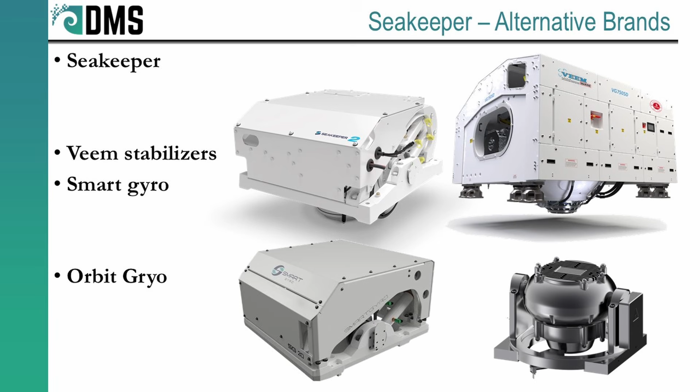I would be remiss if I did not mention that Seakeeper is not the only brand of gyro stabilizer on the market. They're just the brand that will most likely show up at the top of your internet searches. So I may use the term Seakeeper interchangeably with gyro stabilizer. This isn't an endorsement for one brand or another. I'm just here to talk about the technology of gyro stabilizers in general.

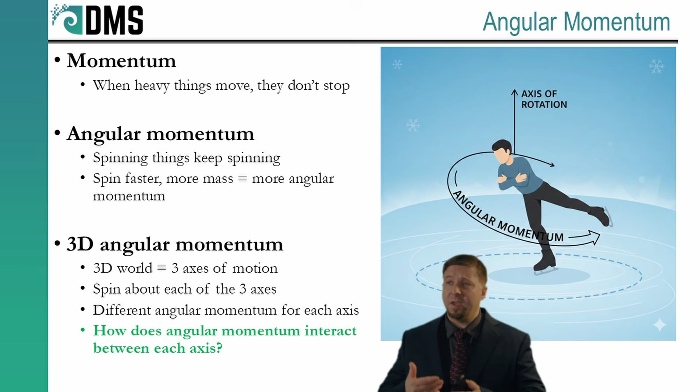The first thing we need to talk about is angular momentum. Ships don't stop on a dime. At some intuitive level, we all understand momentum. Push a heavy boulder forward, and it takes a lot of force to stop that boulder. If you want to sound fancy, we call this the conservation of momentum. Heavy things want to keep moving.

What's a little less intuitive, though, is that the same concept applies to spinning motion. A boulder that's traveling in a line has linear momentum, but a spinning boulder has angular momentum. Spin the boulder, and it takes a lot of torque to stop that boulder. Technically, the mathematics are slightly different with angular momentum, but we'll keep things simple for now.

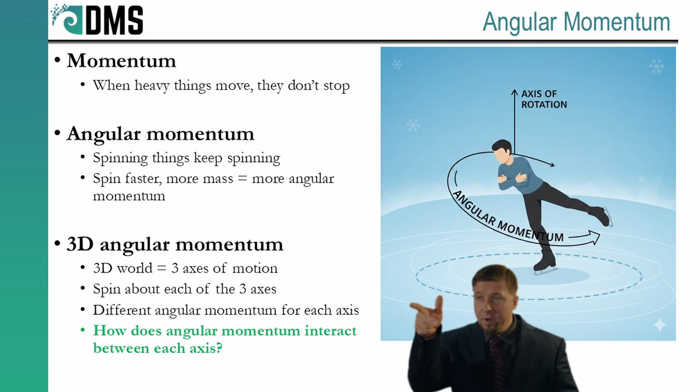Now, where it gets really interesting is when we consider three different dimensions. Remember that we live in a three-dimensional world with three different directions: X, Y, and Z. And in this world, we get three different sets of angular momentum, one for each of the three directions. Here's the interesting question: how do those three sets interact with each other? Hint: weird things can happen. One of those weird things is a gyro.

Gyros take the basics of angular momentum and start exploiting those principles for some really fun effects. So the basic idea behind a gyro is take a small disk and spin it really, really, really fast so we can contain a lot of angular momentum packed into a very small object. But remember, the really neat stuff happens when we start thinking about three dimensions. Think about that spinning ice skater. She's just spinning vertically, rotating about the z-axis only.

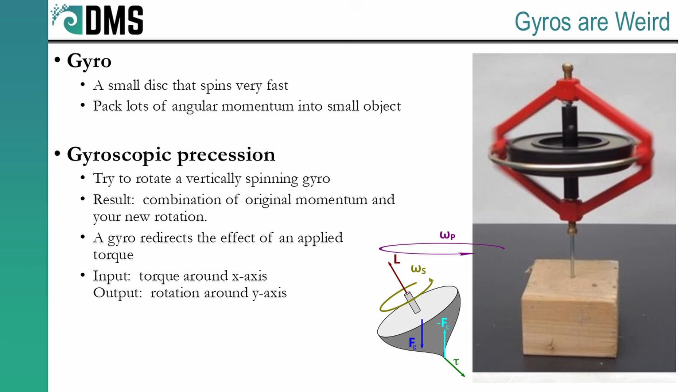But what if we could tilt while we were spinning? Well, what happens then? This is the really fun part behind the gyros. If you take the spinning gyro and force it to tilt the axis of rotation, the gyro is not actually going to rotate in the direction that you're pushing. Instead, it's going to rotate about the third direction. So you've got the direction that the gyro is spinning in, the direction that you're pushing, and the gyro will actually rotate the third way.

We call this gyroscopic precession. So if you take a gyro that is spinning around its z-axis, apply a torque, tilting that gyro around the y-axis, then the gyro behaves weird. Instead of following the direction that you pushed, it takes this new motion and redirects it. So a torque to rotate about the y-axis instead actually creates motion around the x-axis.

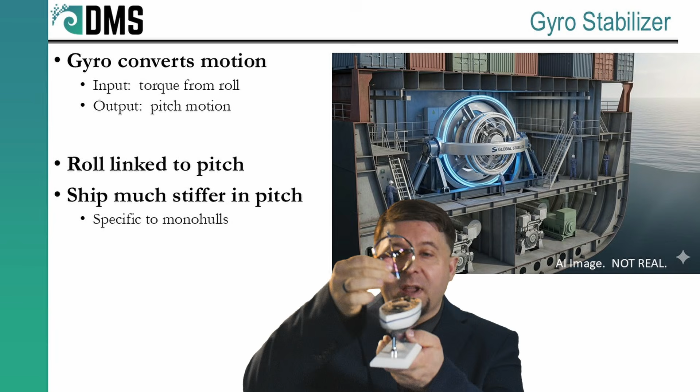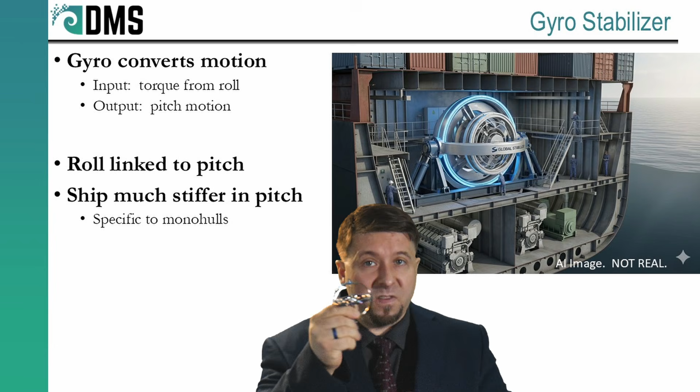So why does any of this matter for seakeeping and roll stabilization? Well, we can use gyros to stabilize the ship motions. If you take a gyro that is spinning vertically and mount it on the ship so that now the ship and the gyro are rolling as one unit, this is what happens when waves are trying to roll your ship from side to side. But the gyro doesn't like this at all. No, no, no. Gyroscopic precession kicks in, which is now going to reduce the roll motion.

Now, to understand how this works, we need to break this down step by step. And it's best to think of the ship and the gyro as two separate items. These two are going to trade forces between each other following their own rules. So first thing that happens is the ship rolls about its x-axis. That's the roll direction. That roll motion is now also applied to the gyro.

Rolling the gyro on the x-axis, though, that creates gyroscopic precession. And the gyro stabilizer does allow this to happen. So even though the gyro gets a torque to roll about the x-axis, instead, it's going to try and react by pitching around the y-axis. The math tells us that if we have this y-axis rotation, the gyro is going to create a reactionary torque and kick back around the x-axis.

Going back to our ship now, that x-axis torque from the gyro gets applied to our ship, and it fights the rolling motion.

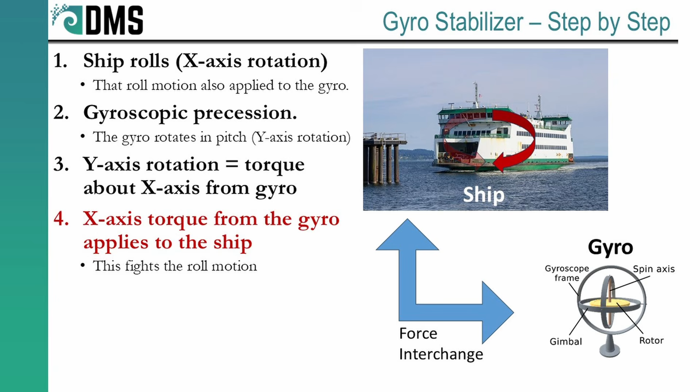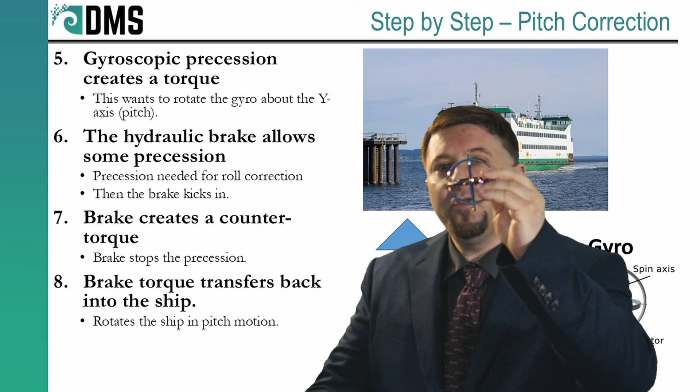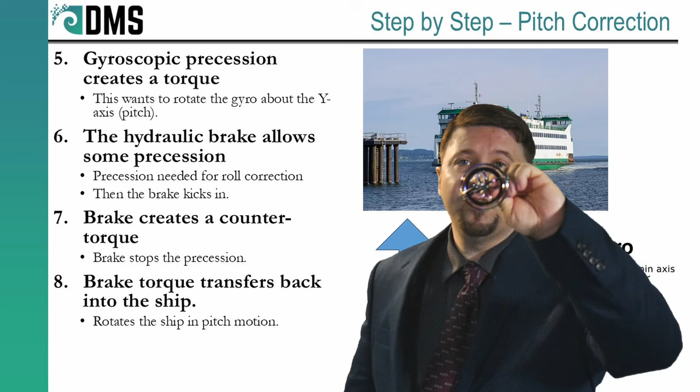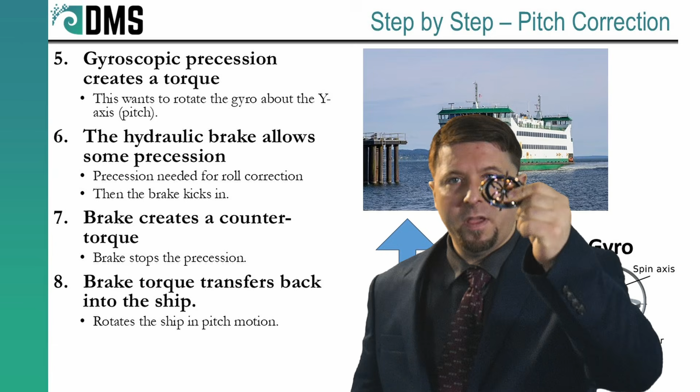So instead of our ship just rocking freely, the gyro kicks in and provides a reaction to stop the roll motion. Now there are a few more subtle things happening here. If our gyro were just free to pivot about its y-axis, to do its precession thing, eventually it's going to rotate a full 90 degrees until its spin axis is in line with the x-axis, with our roll motion. At this point, the gyro would not notice the ship's roll from a physics perspective. We wouldn't get any more gyroscopic precession, and the whole stabilizer would stop being effective. So we need something to counteract that precession and restore the gyro to a vertical orientation.

Seakeeper decides to counteract that pitch through a hydraulic brake. These are two large hydraulic cylinders that are sitting on the side of the gyro. Going back to our model of the ship and the gyro, let's examine what happens when that hydraulic brake does its thing.

First, the gyroscopic precession creates a torque. It's trying to rotate the gyro about the y-axis. Before we just said that it would do that freely, but now let's consider what happens with that hydraulic brake. The hydraulic brake is going to allow some precession. We need that — we need a little bit of precession to counteract the roll motion. But after a little bit of precession, the brake kicks in. That brake then creates a counter torque, stopping the precession. But now you have to ask, where are the forces from that brake going? The torque from that brake is then transferring back into the ship as a reaction force, and this is going to try and rotate the ship in pitch motion.

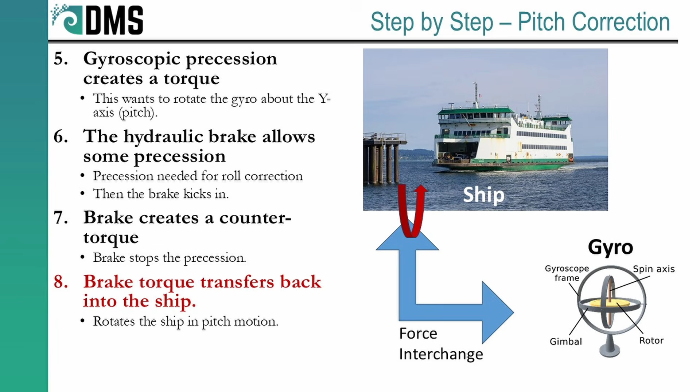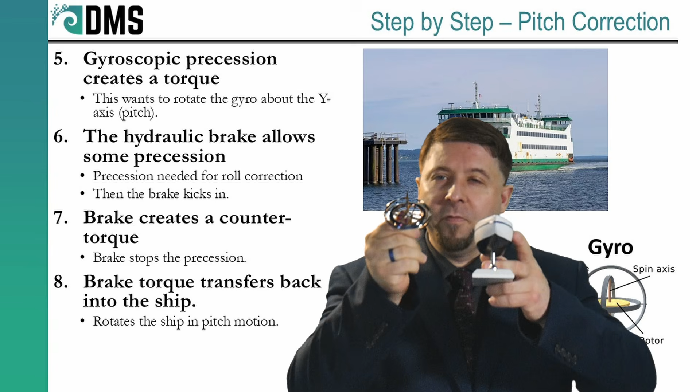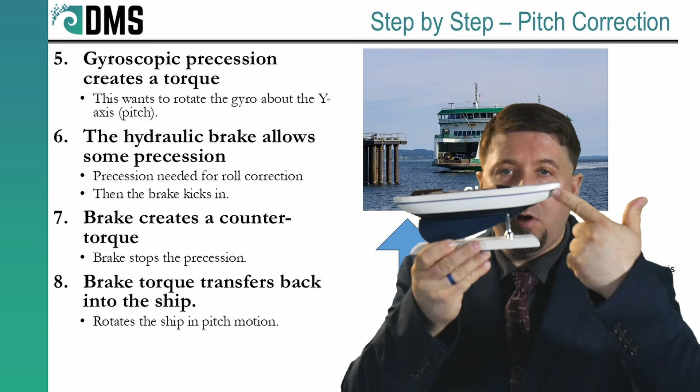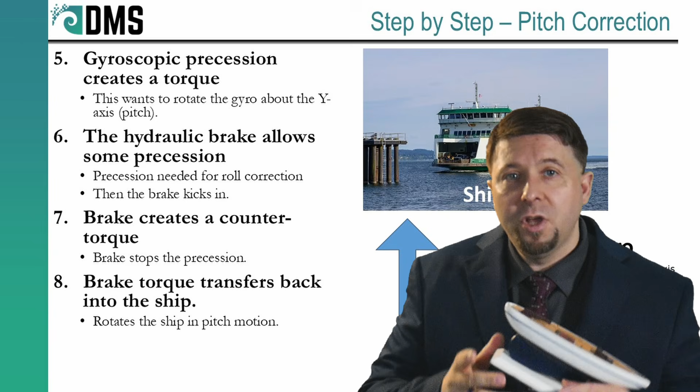So you can think of what's happening here as the gyro taking some of that torque from roll motion, and then doing its precession thing to convert some of that momentum into pitch motion for the ship again. Why do I keep repeating this? What's so important here? Well, it's important because most monohull ships are long and skinny. Their shape means they resist pitch motions far better than roll motions. So by converting that roll into pitch, we're using the strength of the pitch motion of our ship's hull to reduce our roll motions. Pretty neat.

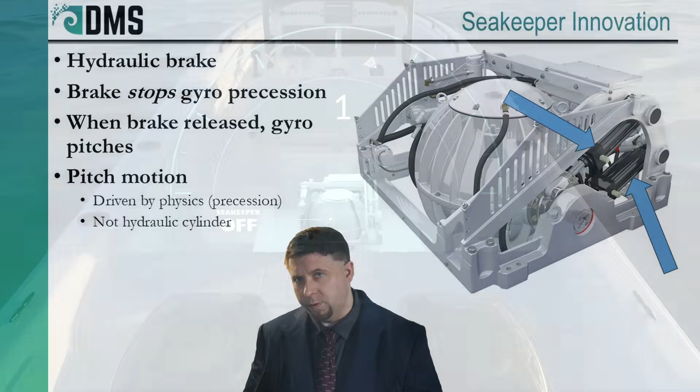Now, one of the unique innovations for Seakeeper is specifically how those hydraulic brakes activate and control the gyroscopic precession. If you look at the animations from Seakeeper, you might think the hydraulics are actually the ones moving the gyro. But no — those cylinders are just a brake. When you release a Seakeeper gyro to start rocking, those cylinders actually release from being clamped down.

The roll motion of the boat itself and the physics of gyroscopic precession are what cause that gyro to start pitching back and forth. And I have to admit, this really confused me at first, because when the gyro stays locked down, you can see there's no roll mitigation. The ship behaves like it doesn't have a gyro, even though the disc inside is already spinning — but it's locked vertically. To really understand this, you have to run through the math.

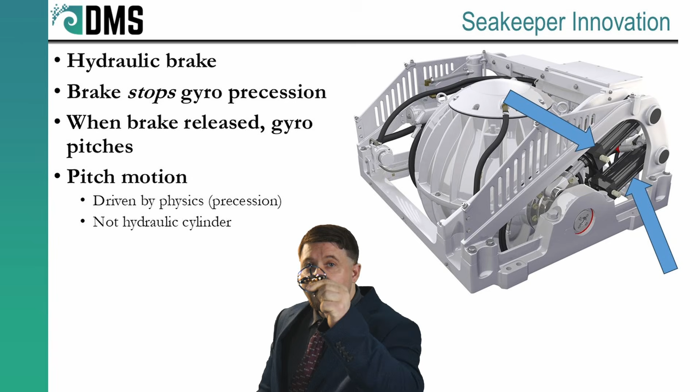It turns out that gyro stabilization depends on both the speed of the gyro and the speed of gyroscopic precession. If you stop either one of these, all of the forces go to zero. But if you then ease off that hydraulic brake, the physics start to kick in. This hydraulic brake is really the key to making a Seakeeper so effective.

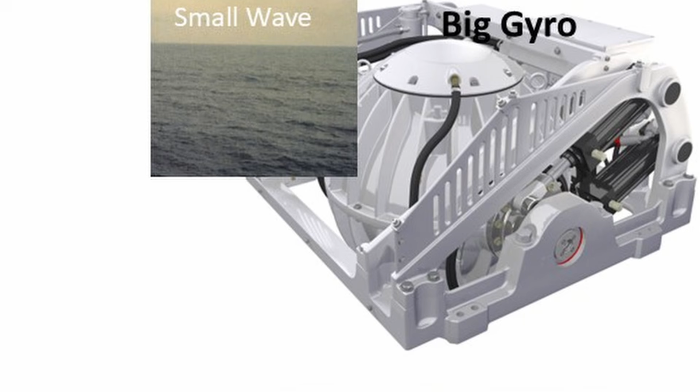So when we dig into the physics, the torque we get from a gyro stabilizer depends on the speed of roll of your ship — the angular velocity. Well, that's not a constant thing. In mild seas, you're going to get very slow roll speeds, very low angular velocity. And in that scenario, for effective stabilization, we need a big gyro with a very fast rotation speed.

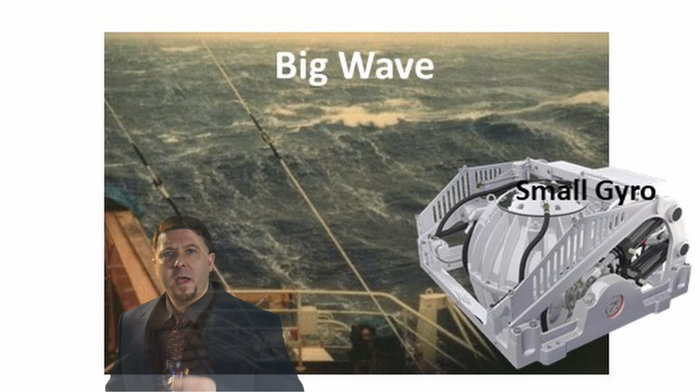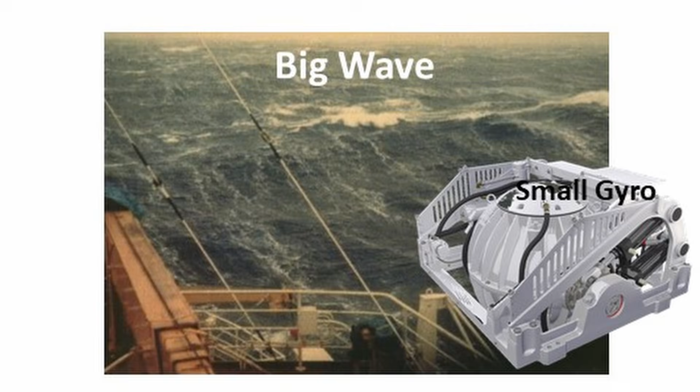But the situation reverses if you go to large seas. Then you've got these big waves, and you actually get large velocities, really jerky motions. At that point, you actually need to fight the physics, to temper your stabilization by getting a smaller gyro, a slower rotation speed. So when we have small waves, we want a big gyro, and when we have big waves, we want a small gyro.

Except you can't have it both ways. The gyro is a fixed size, and it really does take a lot of energy to alter the rotation speed of that gyro. So you're not going to be changing these things on a second's notice, which is about how quickly you have to react on the water.

So how do you create an adaptable gyro without changing all the physical parameters? Well, if you can't change the parameters, change the timing. When you have that hydraulic brake, Seakeeper can control it with a computer and rapidly switch the state of gyro stabilization. You can constantly flip between on and off without altering the gyro itself — and that's because the brake controls precession of the gyro.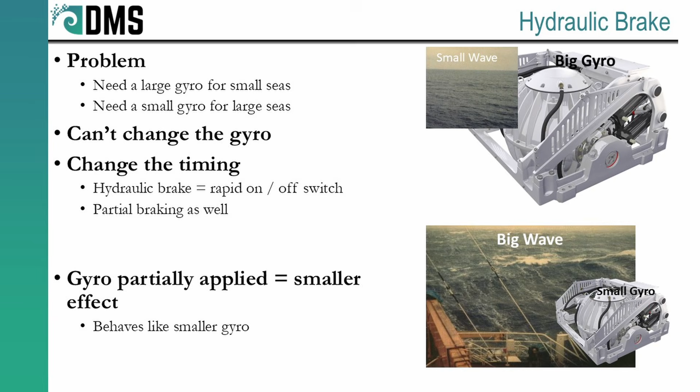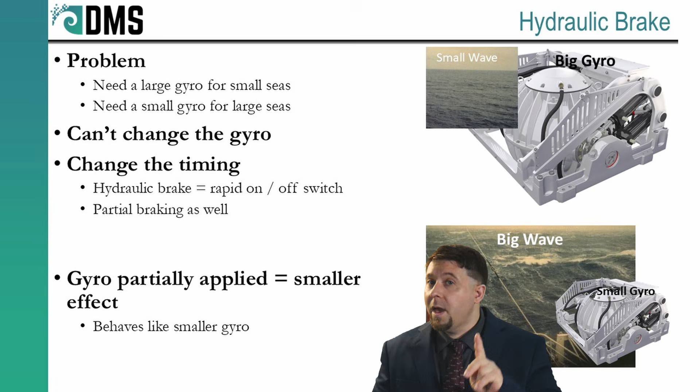If you don't have precession, you don't have roll mitigation. And given the fact that it's a hydraulic brake, you can also do partial roll mitigation, allowing a slower precession, not just on and off. This adaptability means you can oversize your gyro to handle light wave conditions, but in heavy conditions, the hydraulic brake can control that effect, only allowing partial precession. By controlling that hydraulic brake, you're taking what was a single gyro and making it adaptable to a whole range of wave conditions. That's pretty clever.

The second major innovation for Seakeeper lies in the computer that is controlling that hydraulic brake. The computer is constantly sensing the ship's roll, not just the roll angle, but also the angular velocity and the angular acceleration. With all of that monitoring, we get a bit of fortune telling.

On a small time scale, ocean waves are kind of predictable. If you're only trying to look forward 5 to 10 minutes, normally you're going to see the same ocean waves, the same period, the same amplitude. Sure, we still get some random variation on top of that, but there's a dominant pattern you can see, and the computer can detect that pattern. So once it knows the pattern, it can predict the future.

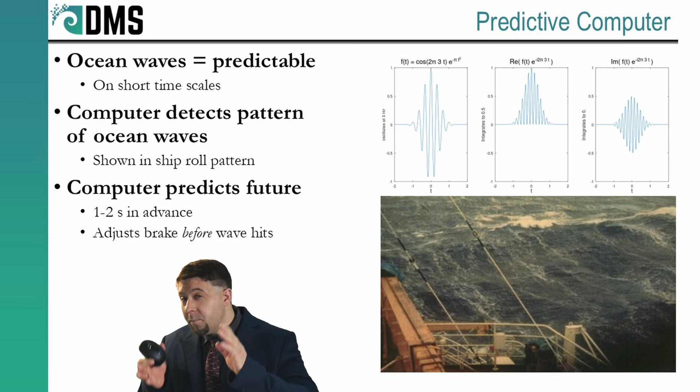The computer can sense where you are right now and then predict where your boat is going to be 1 second into the future, what kind of torque it's going to encounter in terms of roll motion. That allows the computer to adjust the hydraulic brake and start the gyro responding before the wave even hits you. This is how a Seakeeper is so effective with roll mitigation. There's very little delay between a wave hitting you and the response from the gyro to counteract that torque, because the computer already knew it was coming and responded before it even got to you.

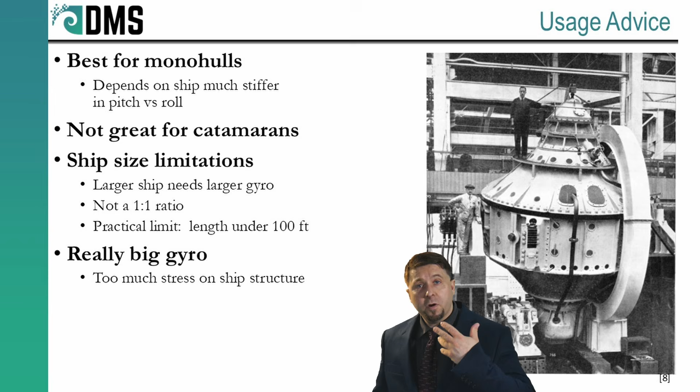Now for a little practical advice. Gyro stabilizers should not become a universal solution. They do have their limits and their problems. For example, the underlying physics depend on the ship having much more stiffness in the pitch motion than in the roll motion. Now for monohulls, this makes sense. But if we start talking about multi-hulls, catamarans and trimarans, this is not true any longer. Gyro stabilization is much less effective when we're talking about multi-hulled vessels.

The physics also suffer from a size limit. As ships get larger, we need more and more torque to counteract those roll motions. That means bigger and bigger gyros. As the size of that gyro increases, practical problems start to creep in. It becomes very difficult structurally to handle the torque coming off of a supersized gyro. So that's why we generally don't use gyro stabilizers on larger ships.

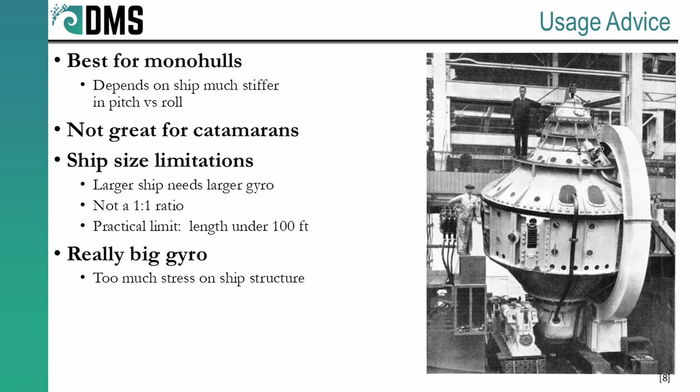Things over, say, 30 meters, gyro stabilizers are not your only option. There are alternative technologies available when we're trying to do roll and motion control. Other options like stabilizer fins, bilge keels, hydrofoils, interceptors, trim tabs, azipods, rotors, U-tanks. The list goes on and on and on. The best solution for your ship is going to depend on a lot of factors like the size of the ship, your speed, the mission, and your budget for motion control.

This is where a naval architect steps in to figure out the best combination. For my own personal preference, rather than immediately going to a Seakeeper, I prefer to use gyro stabilizers as just one component in a whole system of motion control. And I will normally start by considering the cheaper alternatives first, like bilge keels, and then supplement them with more advanced solutions like a Seakeeper.

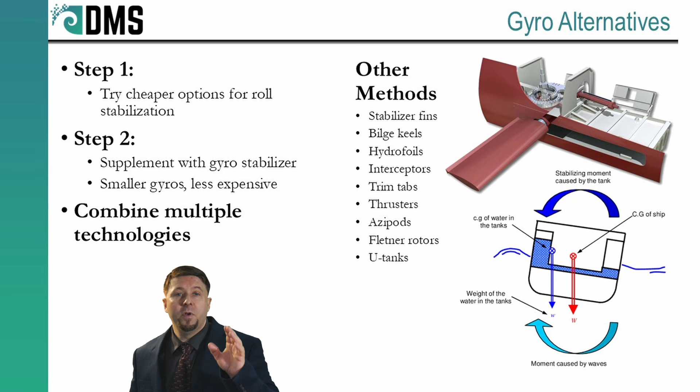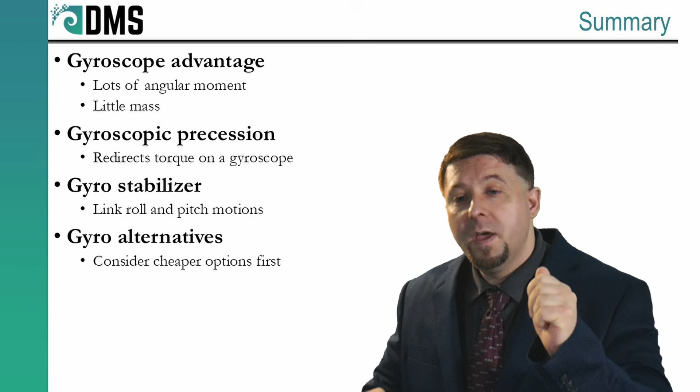So we've talked about gyroscopes in general, and the major advantage being that they can pack a lot of angular momentum into a small package. You combine that with gyroscopic precession, which is a neat little bit of physics, and you get a gyro stabilizer that we can use on a ship. Basically what it's doing is taking some of that torque from roll motion and redirecting it into pitch motion. Credit to Seakeeper, they took the classic concept of gyro stabilization and added in all of the control systems to create a truly adaptable and effective device. But the core principles behind it still depend on gyroscopic precession. It's still the same physics we've known about for decades. And it's that weird bit of physics that couples roll motion with pitch motion on a ship.

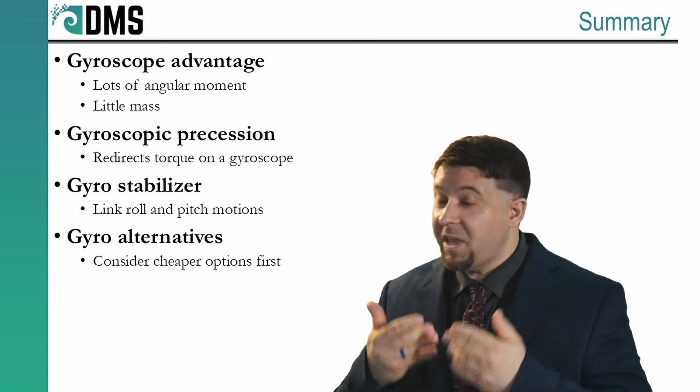If you apply this on a monohull, the gyro stabilizer is a major advantage. There's no magic involved. It's a machine just like any other, with limits and best case applications. But even I have to admit, this is a pretty impressive machine.